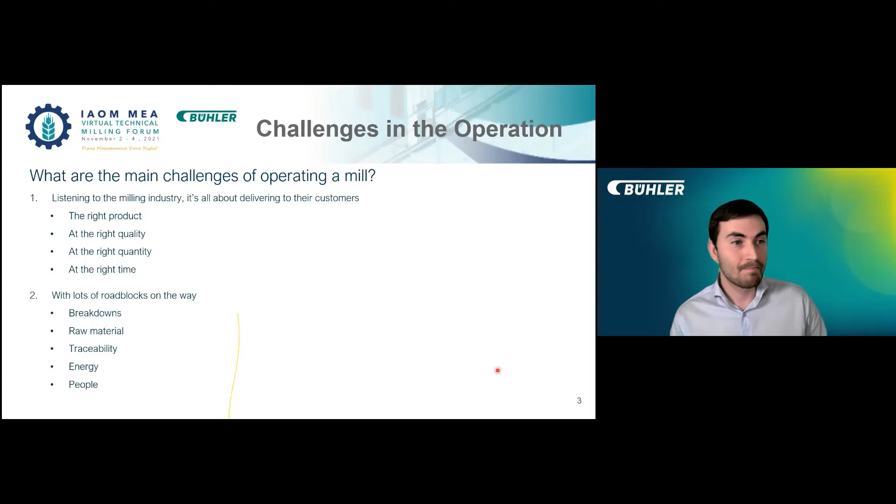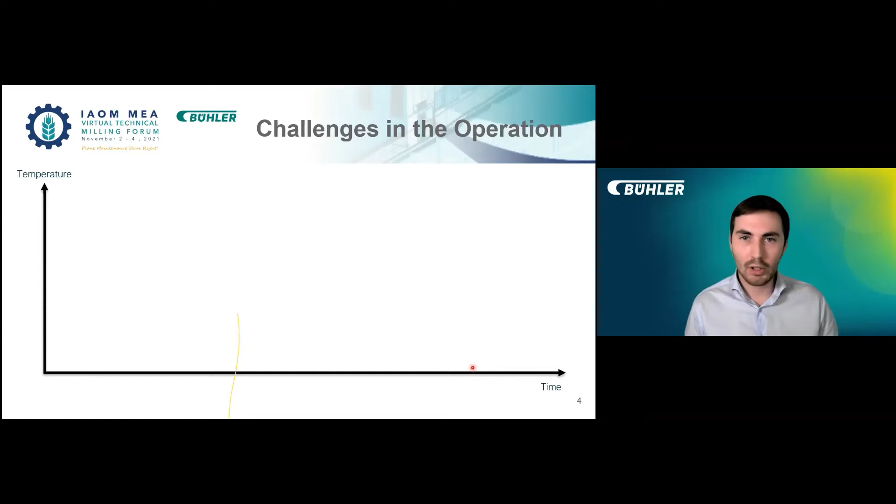So now let's take a step back. I'd like us to reflect, think of a roller mill. Let's look at the temperature over time on a single point taken randomly on one of the two rolls of a pair. Now what do you think will happen? When the roller mill is running in stable production - I'm not talking about startup or emptying at the end, stable production - how will the temperature evolve?

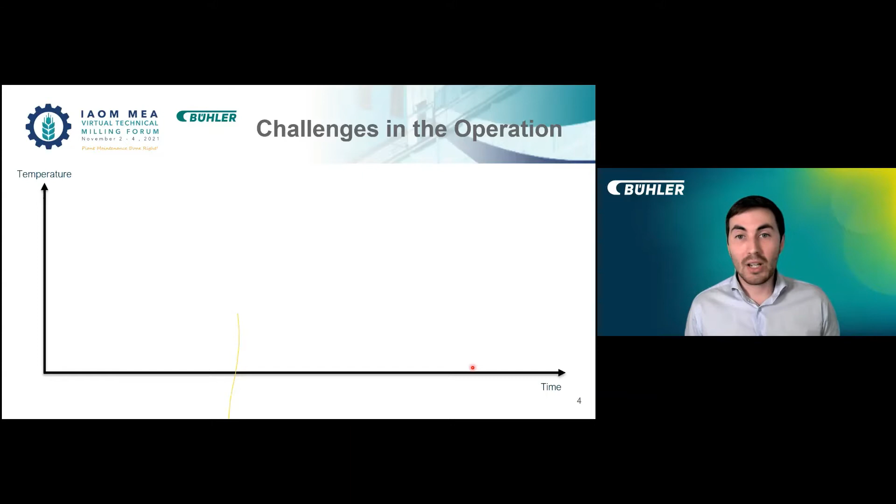We could think it will stay constant, or that it would vary. But actually what we noticed in our experiments and in our labs is that yes, the temperature will vary a lot, and we didn't have any tool to measure it until now. So how it looks basically depends on how much product goes in on the milling passage - for example, a smooth passage will always be hotter than a corrugated one. Depending on how the roll gap is adjusted, you'll also have different temperatures.

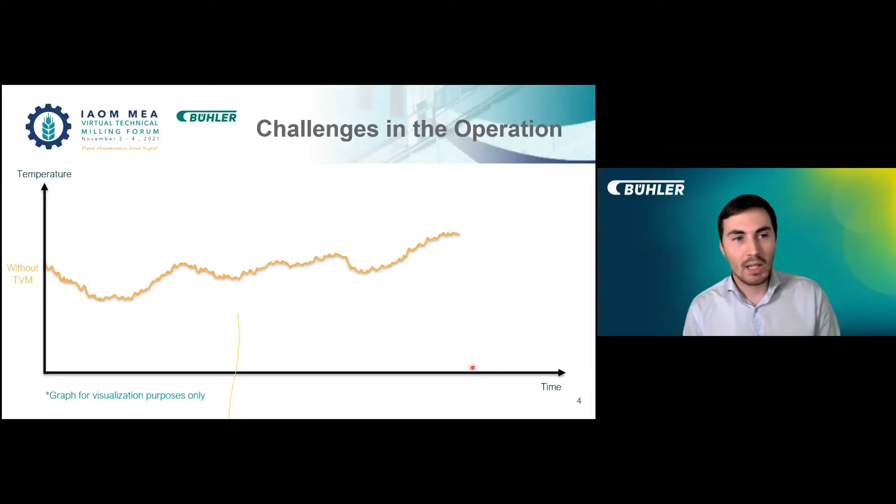And what we've also noticed is that once you cross a certain threshold, it becomes critical - critical because it has an impact on the quality, on your stability of quality, but also on the yield, on the extraction. It has a huge impact on energy consumption - the hotter you operate your rolls, the more energy you will consume. And of course when we add more energy into the system, there will be more wear. So the rolls, the surface, will get damaged even faster, which means in the end more maintenance, more downtime, and quality not as good as you could expect. And this, multiplied by all your roller mills, can make a big difference on the bottom line.

So that's what happens in a roller mill. You always have these variations when it's not controlled, and you cannot do much about it. Even more, until today, you could not even measure it.

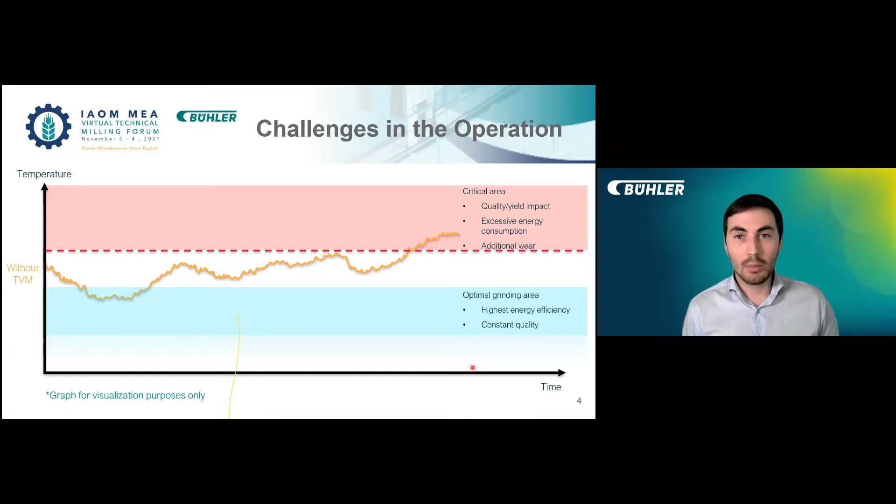So now what we want to do is, because there's this critical area, there's also what we defined as the optimal grinding area. It's where you stay within an upper and a lower limit of temperature, where you get the quality you want - so that you can set yourself for your product - and where you consume as little energy as possible. This consuming as little energy as possible will also have a positive impact on maintenance, because you'll use your rolls less and be able to keep them running longer. So that's actually what the service I will talk about today is about - making sure all your roller mills stay in this optimal grinding area, and that you use the data to stay there for better operation.

So TVM, if I haven't explained yet, is about temperature and vibration monitoring. So it's our newest latest service.

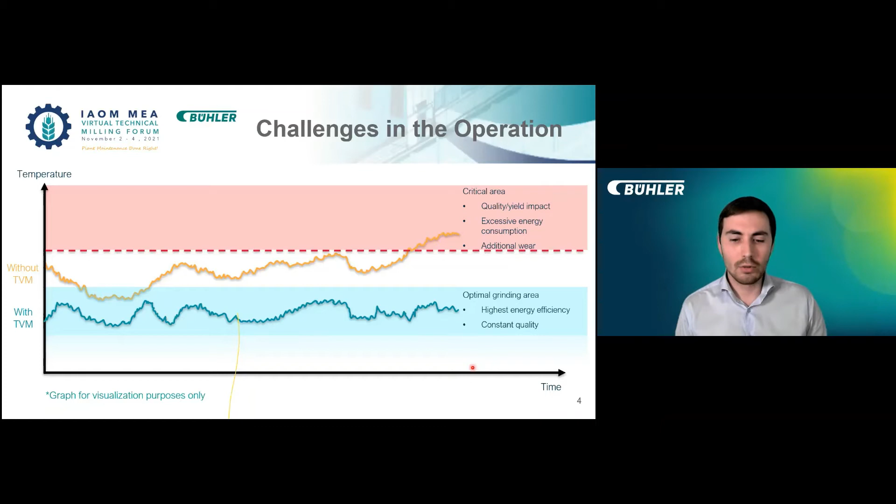So now, this was all a little bit theoretical, but how have we implemented it? Because we cannot measure everywhere, every single point on the surface. So what have we done?

So we have put sensors inside the rolls. There is one sensor inside each roll in a pair, and they measure during the whole length - on the whole length. They're on one side, and then with the rotation you kind of have the temperature distribution over the whole length. And on top of this, we also measure the vibrations with the sensors. So the sensors are placed directly inside the rolls.

So it's completely new. And last but not least, because these sensors are just one part of the service, the value really is in the algorithms that will allow you to always stay in this optimal grinding area and detect when you get out of it. As I said, it's not that easy, because corrugated passages and smooth passages don't behave the same. You have a lot of influence from other parameters, and you need to extract all of these. We've done this through machine learning and data science, to really extract what's needed and provide the right alert to the operator, to the miller. We'll go into all these details later, because yeah, we really have the time for it.

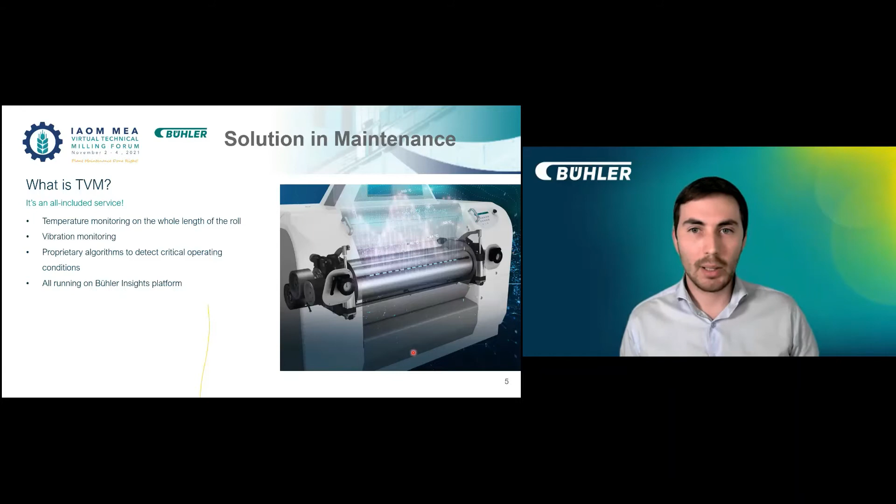You can see that we have automated over-temperature detection. Once you go above a certain threshold, we send you an alert. This is more, let's say, for safety. In the future, we'll also be able to shut down the plant. So this is when it's really hot. When you get a little bit outside of the optimal grinding area, it doesn't make sense to shut down the plant. We just give an alert, and then things can be readjusted, and you can go back into the optimal grinding area. But when it becomes really critical, you need to shut down the plant.

Now, what we have also developed is an automated detection of temperature imbalances. I will come back to that. We'll go into real examples, real data. Then I will show you what imbalances really mean.

Of course, another feature is temperature and vibration visualization. So you can also use this raw information for your own benefit. If you have some ideas, things you would like to test, this data, of course, is yours. And it's always possible to have a look at it.

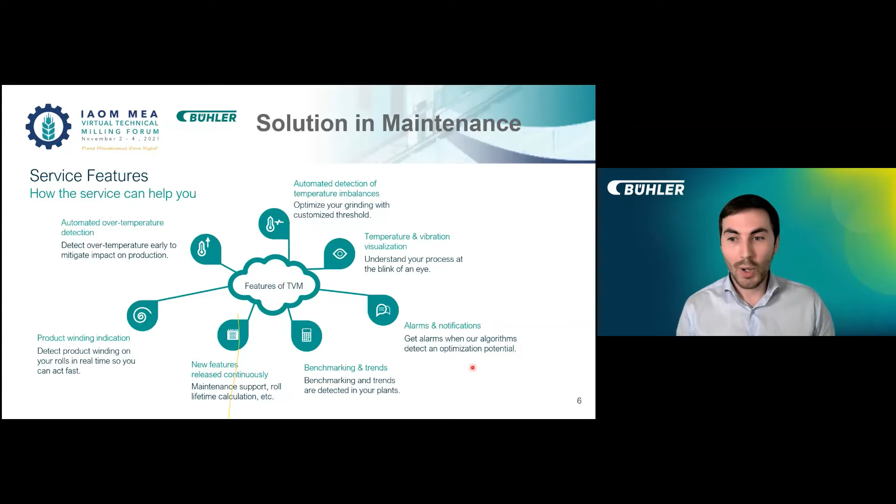Also very interesting, I will show you later a concrete example, is product winding indication. So we are able to detect when the product gets stuck on the surface of the roll. And then we will see what are the consequences of this. At the moment, it is possible to detect it only when somebody is in front of the machine and has the luck that it happens when they're in front. Otherwise, these cases just go unnoticed, and I will talk more about that.

Now, also what I want to say, all the notifications and alarms are also included as part of the service. You can get them through emails or even SMS, so that even if you're moving around the plant, you can be alerted. You can also select during the shift so that you only get alerts when it's your shift, and not when you sleep, for example.

Now, a very interesting feature is the benchmarking and trends. Of course, you can use this in a single plant, but it also allows you to have very precise process control and to produce, for example, the same recipes in different mills, and at the end obtain the same quality. We know it's a challenge for some of our customers that they have quality differences that are sometimes unexplained, and this service goes into this direction.

And here I want to say, grinding is one of the most important things in the mill, but it's not the only thing, right? So of course, it will not fix everything. If the dampening is wrong, then the service cannot really help, because the other things also need to be right.

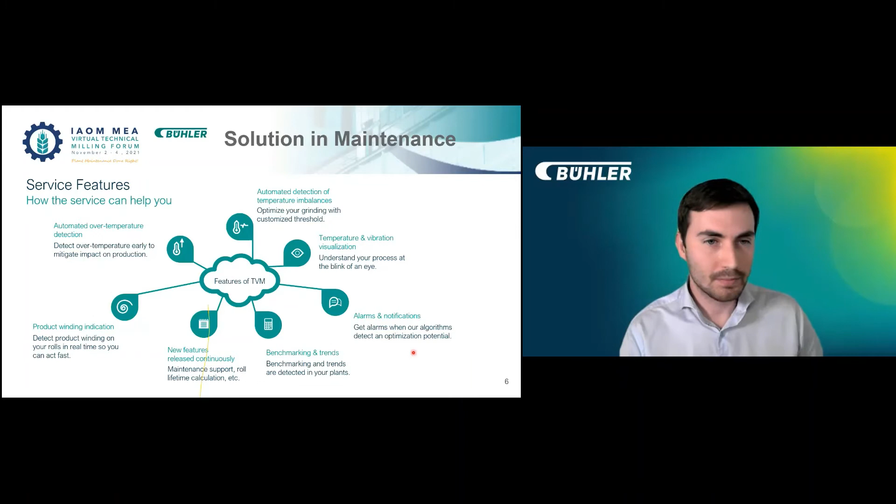Because when you have this mass flow disturbance, this can create a lot of issues also in the plant sifters. So we have this on our radar as a more long-term feature that we will develop.

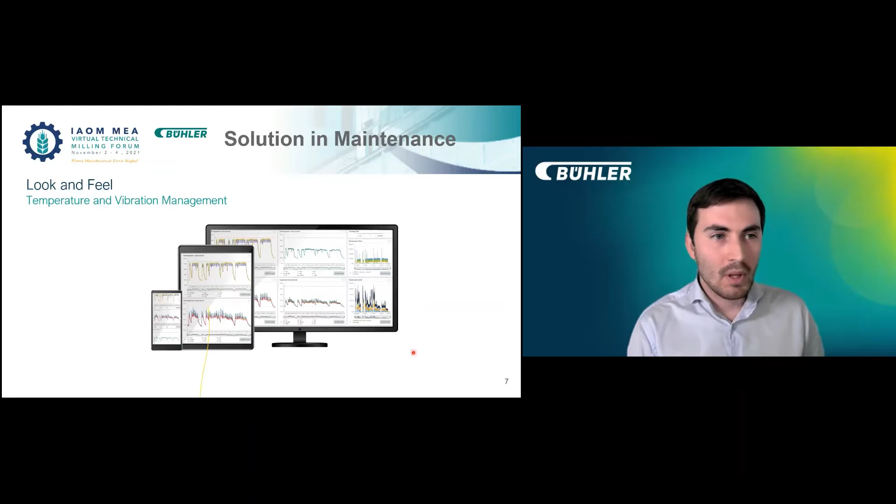So now let's go more into the technical details. These are the sensors we're using. These are long sensors, and of course we have different sizes because we have different sizes of rolls.

We measure temperature along the whole length, which means that for a 1 meter roll, we have about 9 measurement points. For 1,250 millimeters, we have 11. And for 1.5 meters, we have 13 measurement points, which gives us roughly one measurement every 10 centimeters.

We have one vibration measurement on the left edge, which is usually enough because vibrations are also transmitted, so from the right side we're also able to detect it. We put one sensor in each roll, which means that for each passage there are actually 2 sensors.

The sensors are also a little bit smarter because they run on battery, so we need to optimize how the data is transferred. When we are within the threshold, the data is sent every 5 minutes. Once the temperature increases and can become critical, we want to increase the frequency at which we transfer the data.

So we don't have to wait 5 minutes. The sensor reads it, and if it's already increasing, it sends it directly — it doesn't have to wait 5 minutes for the next measurement. So it's really the data transfer interval, not the measurement interval.

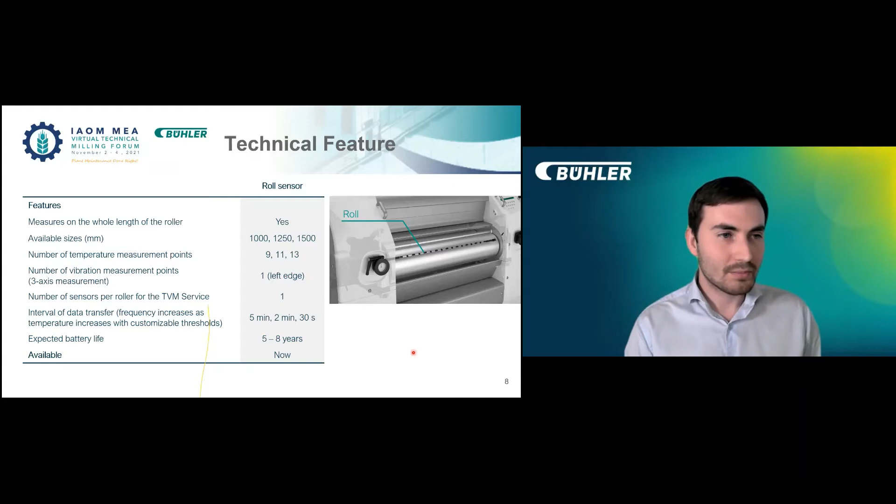Can we detect uneven and faster roll wear? That's a really good question, because usually how we do it is we feel with our fingers the wear level of the rolls, maybe at one location. But that's really interesting, because depending on how the rolls are operated, they won't be worn out the same way everywhere, which can be a problem.

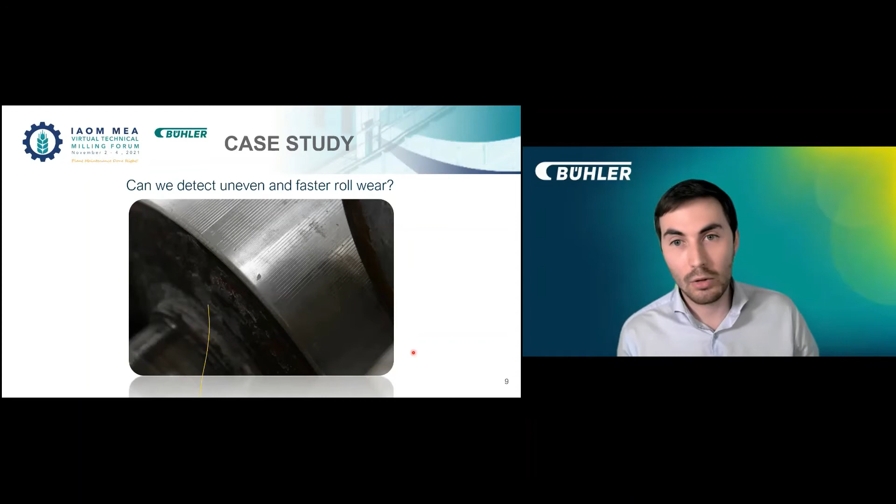You may think a roll is running in good condition, but then you didn't check the left side where it's actually very worn out, and then you're consuming too much energy, losing throughput, and so on. So can we detect this? Actually, yes.

This is caused by temperature imbalance from one side to another — left to right or right to left. What this creates is uneven granulation over the whole length, uneven roll wear, and additional energy consumption, because you're pressing more than what a break passage, for example, is designed for. You also have a loss of throughput because of recirculation — some product that should have been reduced in size is not, and has to come back.

And of course, this impacts your bottom line in the end. And here we can see it really in the data directly. The blue lines represent the left edge, so the more blue, the more left. And when it becomes green, that means it's actually the right edge. So here we can see a big imbalance, about 30 degrees, let's say, from the left to the right.

That was during our tests, and we told the operator, look, you have a big imbalance, please do something. The operator was kind of blind, didn't have access to the data. So he adjusted, and then told us, yes, okay, now it's adjusted, fixed. Thank you for the tip.

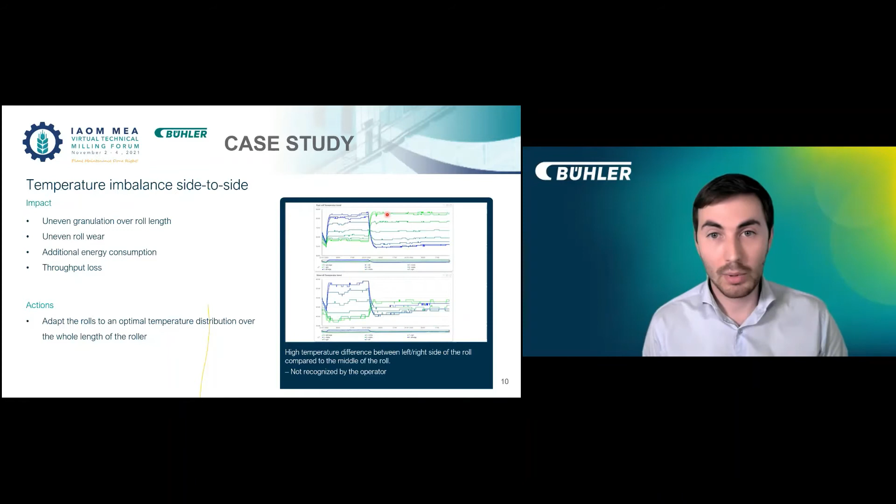Now, let's talk about the second case study. Here, it's also something we can detect. So we had the imbalances side to side, but we can also be more granular, because we measure every 10 centimeters, we can detect temperature imbalance from the middle to the sides. And that's a really interesting one, because these issues are, to my knowledge, almost never recognized by the operators. It takes really experts to figure out what is wrong in the end. And here we can really support on this part.

So here you can see real data shown a little bit differently, because last time we showed you was only over a few hours, few minutes. Now it's really over a month. So let's imagine this is a roll. Here you can see, that's the left side, position 0, and then the right side, 1 meter. So this roll is 1 meter. And then we checked over a month how it's running.

So all the blue lines, that's when actually the mill is not running, it's the ambient temperature, the roll mills are shut down and not producing. And when it's colored, then you see it's during production. And you see that from June until October, it was really warm in the middle. What this shows us is that you're not grinding your product the same way. So either you only have product in the middle, or maybe your roll crowning is wrong, or maybe the adjustment is also wrong. It's hard to know before you have a look, actually.

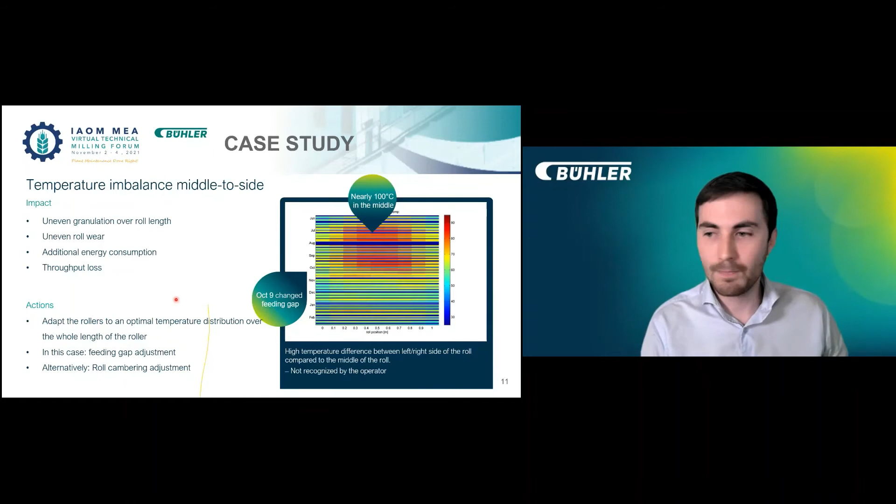So another very important case is the over-temperature detection. Here we talk more about safety. Once we reach a very high temperature, this can become very critical. It can damage the roll surface. Of course, the process becomes very unstable.

If it happens one time for 5 minutes, you should be fine with your product. But if it happens very often and you don't notice it, it can be critical for the safety of your assets and your people on site. It will also cost you a lot, and you'll relatively consume a bit more energy.

So what we can do is inform you proactively when it happens, so you know very quickly that something is wrong. You can adjust the level at which you want the alert. And if it goes really high, to an even more critical level where you suspect fire, we are working on a next feature that will also be able to shut down the whole plant.

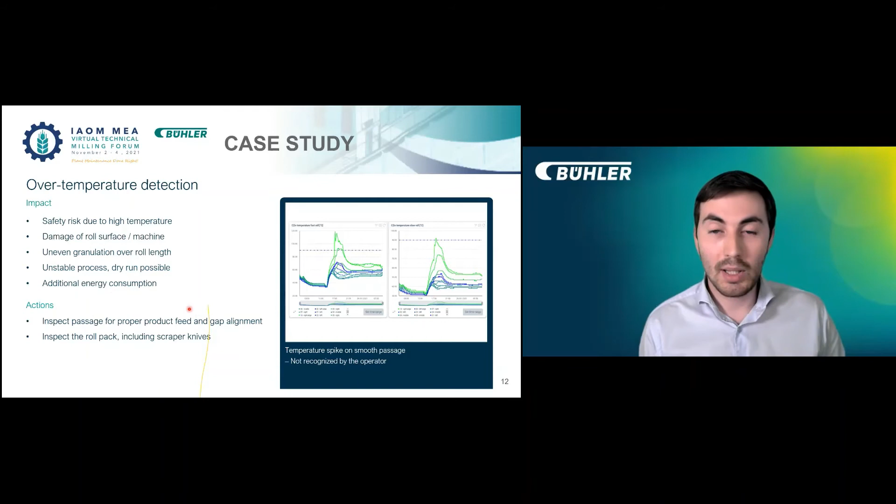Now I'd like to show you this interesting case about winding that I mentioned earlier. When the product gets stuck, what happens? You can even have products going out, some damaged parts inside. So the consequences can be really severe.

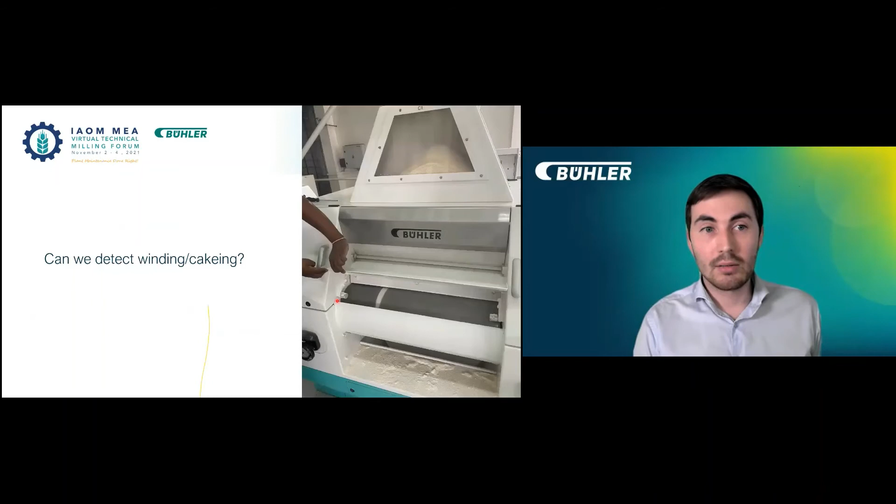Can we detect it? The answer is clear, yes, we can detect it, and we can detect it because of two things. The temperature goes up, but then how do you distinguish temperature going up in one case from another where it's caused by winding? The answer is through the vibrations. Once we see the temperature increasing and at the same time vibrations going up, and we see that these two match, then we are almost sure it's a winding indication.

At the moment, we have not found any other root cause for that. Every case was winding. And that's what we now call a winding indication. So yes, it's a safety risk, and you can damage your asset.

What happens is the product gets stuck, and at every rotation it's kind of shaking the whole roller mill. It's consuming more energy, and for your product quality it's also not the best. I mean, the same happens, you're losing stability.

Now, if it happens one time for 5 minutes, it's fine. But what we've noticed is that when it happens on a roll pair, it will also happen again many times in the next weeks. And this comes, in this case that we investigated, because the data will not tell you exactly what to do. It will tell you a possible root cause, but there still needs to be a human relying on the data for their decisions. In this case, it was really about the scraper knives being adjusted wrong.

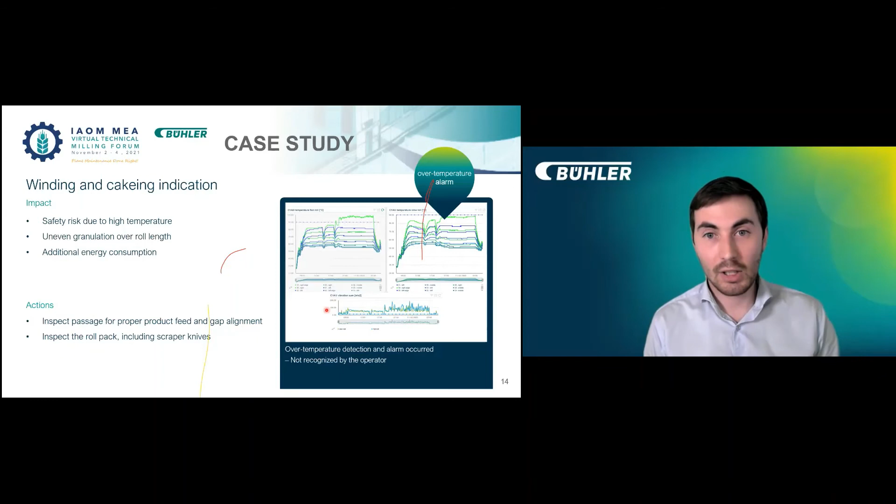By the way, all these cases that I mentioned were not even recognized by the operator when he's in front of the machine. So there's really an additional benefit: you can detect stuff that was not possible to detect before.

Here I want to talk a little bit about what's coming in the future, what we call vibration in suspend. Suspend means for us that when the rolls are disengaged but still rotating, so it's still running. Here we can actually run a health analysis on the system and look at the vibrations. Is it normal according to what it should be? Because it should actually be the same for every roll mill, and we know this because we also build them.

Once we detect this, we also tried different cases. For example, loose bolts on cardan, we can detect through the vibrations. Inadequate belt tensioning, if the tensioning frequency is wrong, we can also detect it. This is very interesting to monitor the health of your machine and then put the proper actions in place to fix it.

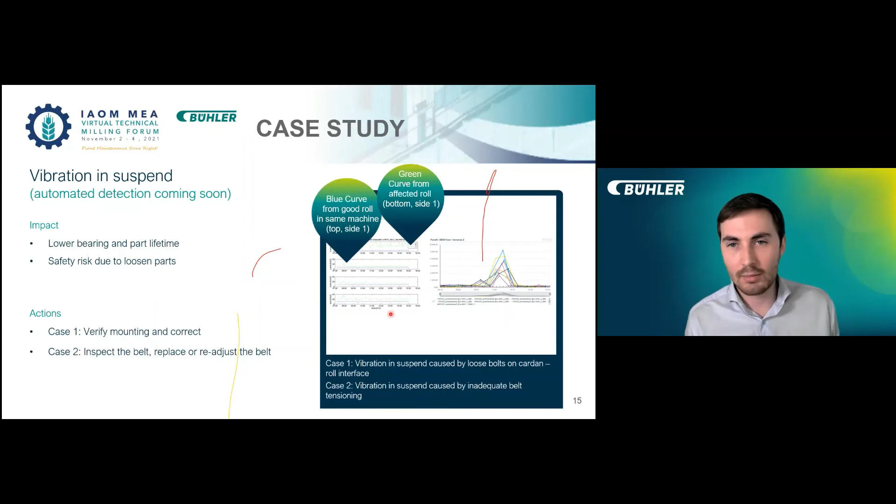So here we really go into predictive maintenance. We detect what needs to be done in advance, instead of a periodic check that you do every month, where sometimes 90% of the time it's already good. We could see all these cases in the data, and now we're working on automating a health check whenever it's in suspend, so we have a look at the data and can inform the operator directly, without him having to check the service.

That was also a very interesting case. It took only 2 hours here. So you basically have the smooth roll, how it was looking before, and then the new smooth roll, let's say even smoother than before. All of this because the scraping knife was not adjusted correctly, which was very interesting for the operator who was in front of the machine.

We called him and told him, look, there's a problem here, we see it on the data. And then in front of the machine he told us, no, I don't hear anything. So the vibration sensor is much more precise than the human ear. We are able to detect critical operating conditions that the human ear, eyes, or fingers cannot detect.

This is quite interesting, because this roll is good for refurbishment already now. Otherwise you can keep it running, but then you will consume more energy, it will impact your quality, and in the end you're also not winning. So as I said in the beginning, the best maintenance is probably the one you don't have to do.

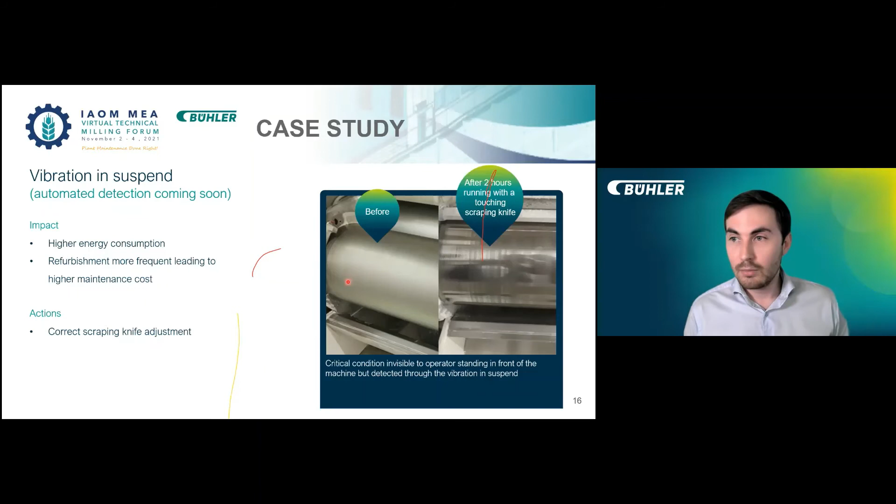So now let's have a look. I've shown you quite a lot of case studies, but then I always get the question, okay, what's in it for me, what can I expect? This is always very difficult to answer, because it depends on how you are running today. If you already have the most optimized mill, probably the service is not for you. If you think you can improve and put this service into your continuous improvement program, then the service is for you. I can assure you that most mills I've visited, we always have potential for improvement everywhere.

Here I want to show you exactly what you could expect. First, energy consumption. I've talked a lot about it, I think it's really important, and more and more in the future it will become important. There's really a clear benefit there. If you can lower the temperature to the minimum that still gives you the quality you want, you can really decrease the energy consumption.

So here I say overall 8% in the milling section, that's what we measure at one customer. But on specific passages, the hot passages let's say, if you can decrease temperature even a little bit, this will have a huge impact, and you can have savings up to even 20%. Of course this needs to be done carefully, you don't want to impact your quality, you want the right quality, but then you have a tool to measure it. If you also have a modern roller mill or additional measuring equipment for energy, you can see it instantly: you reduce the temperature and then clearly see a reduction of energy consumption.

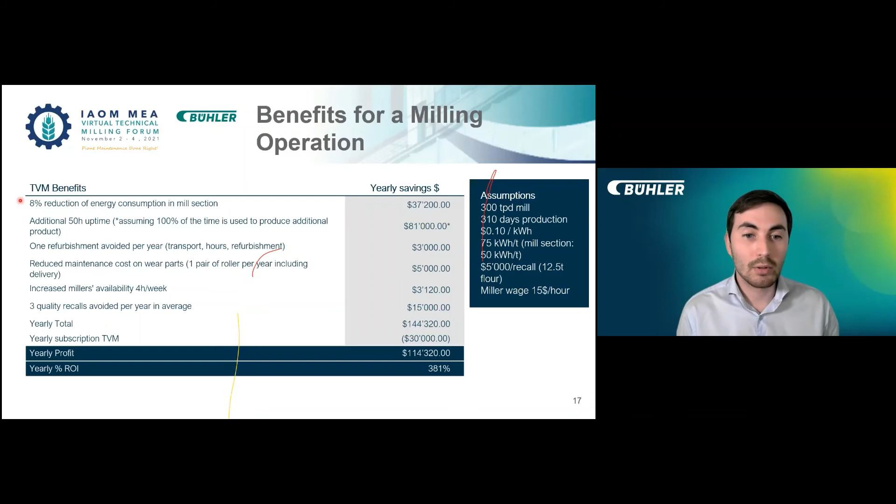Now, also interesting is the miller's availability. You want your skills to really do valuable work, but going in, taking samples all the time, checking passages is time consuming, and now this task can be automated. So it's now possible to focus on really the highest value tasks. We expect, let's say, half a day per week extra availability, also depending on how much recipe change you're doing in your operation. This should be calculated for each mill, and we can support there with the calculation.

Since we also expect better quality stability, we also expect fewer recalls from customers. But you can only estimate this yourself: do I have a lot of recalls already today, or am I producing for maybe one customer, always the same recipe, and then it's easy? Maybe you have fewer recalls. It really depends. It could be that in the end you get more, and it could be that on certain lines you get less. So these should be calculated for each mill to see if it's worth it to install the service.

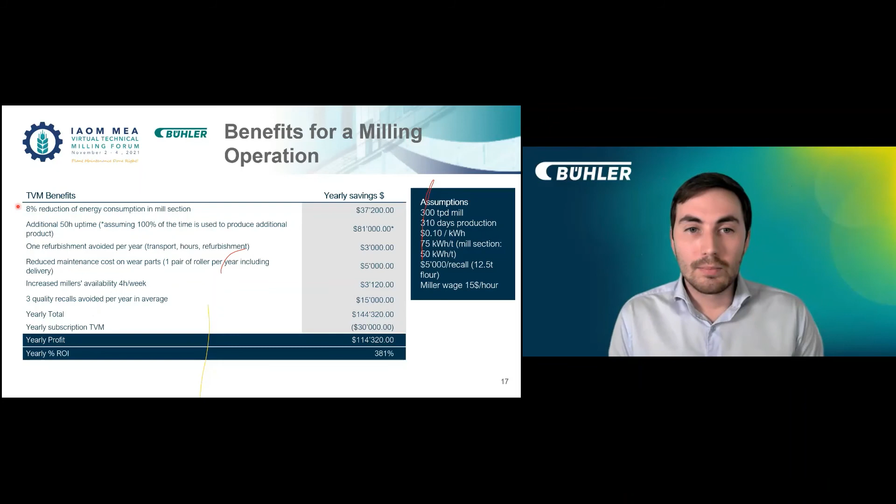So, to summarize my presentation, I would like to say that this service really is helpful to detect critical operation conditions very early, so we can act in the mill in advance before critical things happen and impact production, or worst case, in order to preserve the assets.

The second point is also consistent product quality that we want to get with, of course, the lowest energy. The service will help with lower energy consumption, higher throughput, and more optimized operations. So here we're really looking for the last percentage of gain you can get.

Now, since this is also a tool relying on people, it's not all automated—somebody still needs to look at it and take the right decisions based on the data. Then your knowledge of the grinding will also get better. For the first time, we have sensors at the closest point of the grinding, and we can learn—it's also an opportunity to learn what is the optimal temperature level for each recipe for your quality. Once you have this knowledge, you can transfer it to your other plants and learn faster and get even more benefits.

The last one is data transparency—benchmarking, looking at your temperature level across different milling lines that you probably have, and helping standardize the quality, having the same high quality for all of your customers across different production lines. It's also very useful on existing assets. The service is also available for retrofits, which is probably the highest market, and yes, it's also available there.

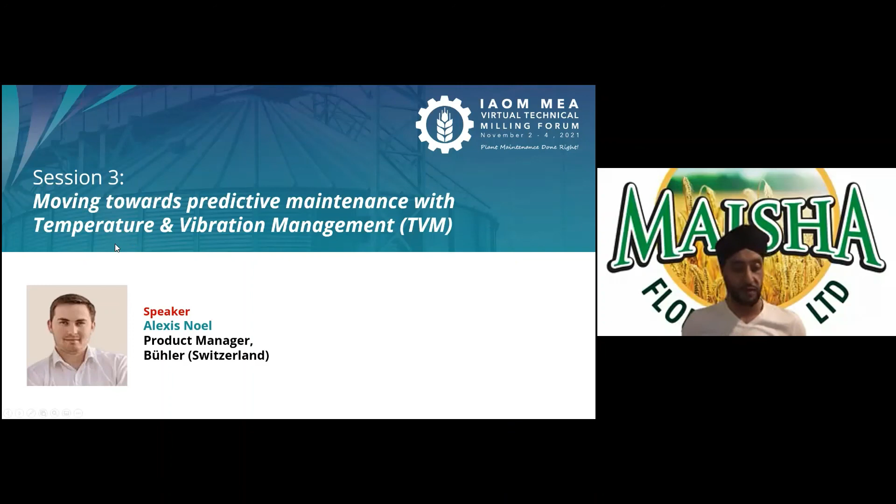Alexis, thank you very much for your interesting presentation. And in the spirit of kicking off the question and answer session, I'll do that first, and then we'll open it up to the floor. So I'll go straight—there's a big list of benefits that the TVM is offering us. Is it really possible to achieve everything, all of it?

There is always potential, but how much you achieve depends on how you're currently operating. If you've already optimized everything, the benefit may be lower. But we see that some mills have strong points and weaker points - some are good on quality consistency but less on energy. It's actually possible to have both, we just didn't have the tool until now. It's always case by case, we need to calculate it.

And as the TVM initially stands the way it is, are there any future plans to expand the role that TVM will cover for us as millers? Any additions that we'll be looking at?

Yes, installing the service is also investing in the future, because we plan a lot more integration. For example, with our integrated grinding system, Arrius, we will release features that will, whenever possible, be available for all TVM users, but there will also be premium features included with our latest machines. We can combine all the data we get from the Arrius grinding system and develop new solutions in the same direction.